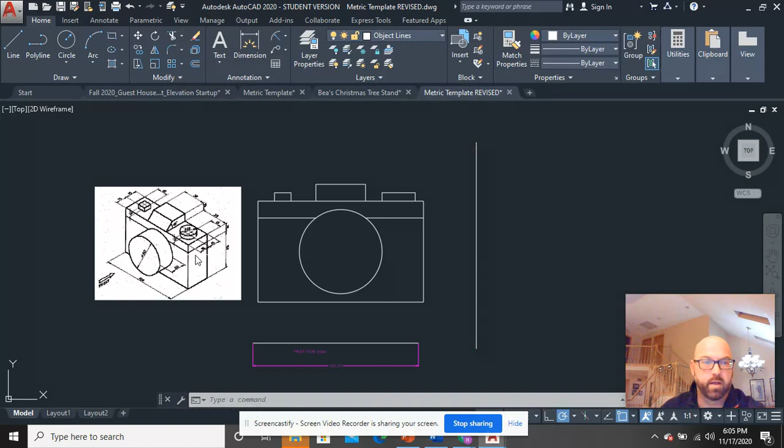So what I'm going to do is draw, looking at the right side here, a long vertical line. There's only a couple of dimensions that I'm going to have to input here.

So the width of the camera, they broke up into a couple pieces. They gave us the depth of the lens, which is 20, and then the body of the camera, which is 15 and 15. They did that so you can see that these buttons are centered, so they go 15, 15. So 15 and 15 is 30, plus 20 is 50.

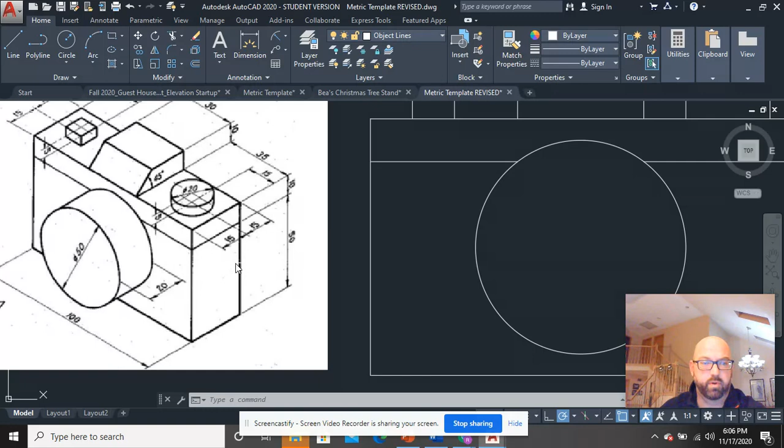So I can go offset 50, and that puts me at the back of the camera, but I needed the lens part as well. So I go offset 20, and then this area between here and here is all lens.

Why did I draw these lines longer than the height of the camera? So that I don't have to be careful, that's the reason.

So what I'm going to do is draw a real nice long line and shoot it over this way, again so I don't have to be careful. I'm going to tug this line from here and move along, asking myself, do I see this or do I not see it? So I go copy and I'm going to go from here. Now, what do I see?

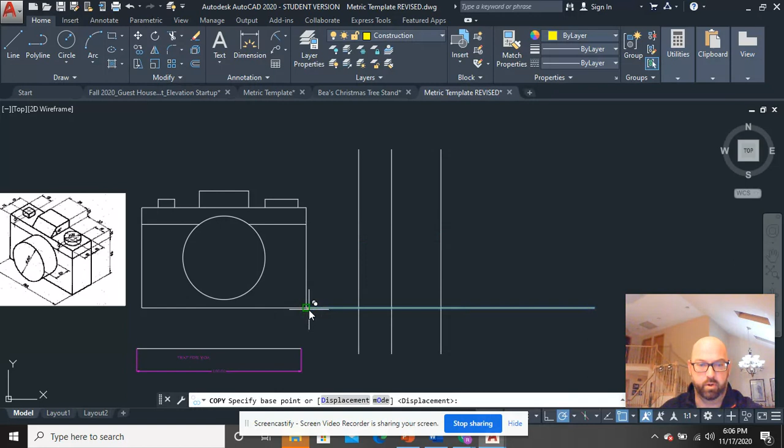I see stuff before I get all the way up here. Like from the right side, I would see the bottom of the lens. Now you can see why I made that line nice and long, so it goes all the way through the camera. Do I see anything else?

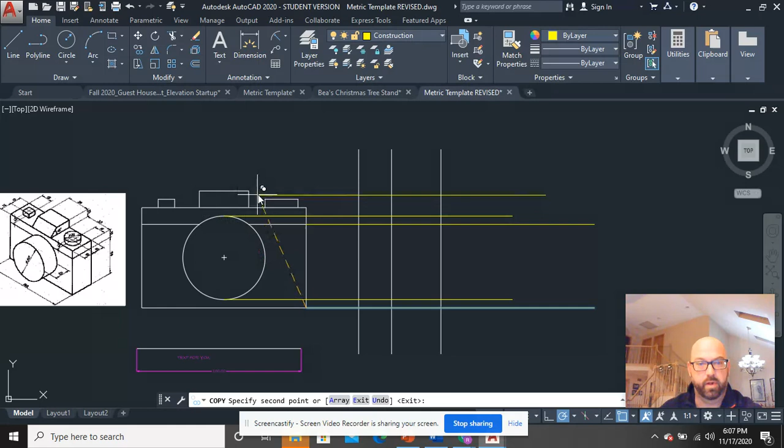Yep, I see this racing stripe looking thing. Do I see anything else? Yep, I see the top of the lens. How about now? Yep, top edge of the camera. How about now? Yep, I see that button. How about now? Yep, I see the edge of that wedge-shaped piece.

So it looks like you have a tic-tac-toe board from hell, but it's not that big of a deal. I'm going to neaten things up a little bit and go ahead and trim. I'm going to trim everything because nothing sticks back here, and nothing sticks back here, and really nothing comes inside of here, but let's go really careful, one step at a time.

I know that I can get rid of that and that, okay? That's the top of the camera, the tallest point overall. So let's work from the bottom up.

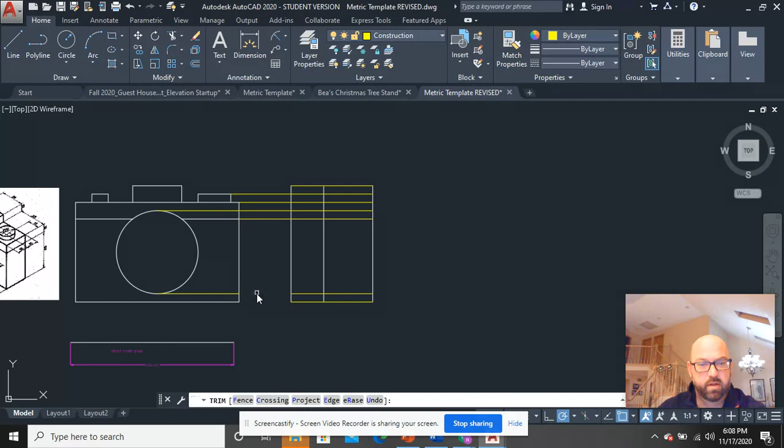What is this? This is the bottom of the lens, which we know doesn't stick in between. This is just the space between the two views, and we know the lens does not come down there. What about here? Do we have anything?

So let's go to the top of the lens and keep it easy. Here's the top of the lens. Follow the line over, follow the line over. And there is nothing above this right there. So that's the top of my lens.

Does this stripe go through the lens? It sure doesn't, so get rid of that and get rid of that. And there's the stripe.

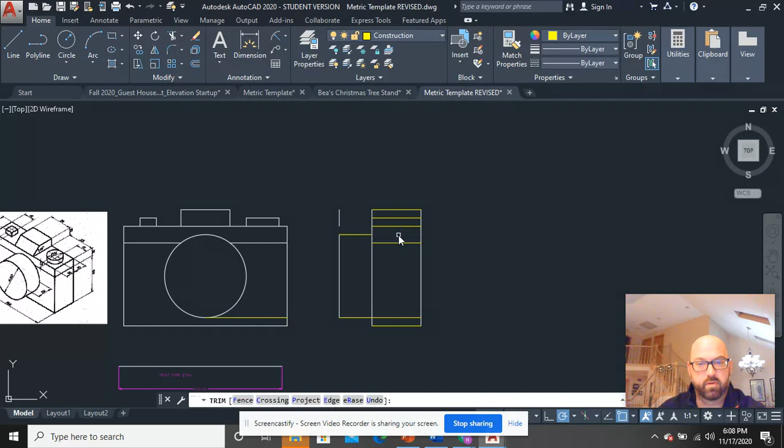This is the top of the lens. Look back over here, does the top of the lens go into the body of the camera? It does not, so get rid of that. Does the bottom of the lens go into the body of the camera? It doesn't, so get rid of that.

Take your time, and you might have to go back and watch this a time or two.

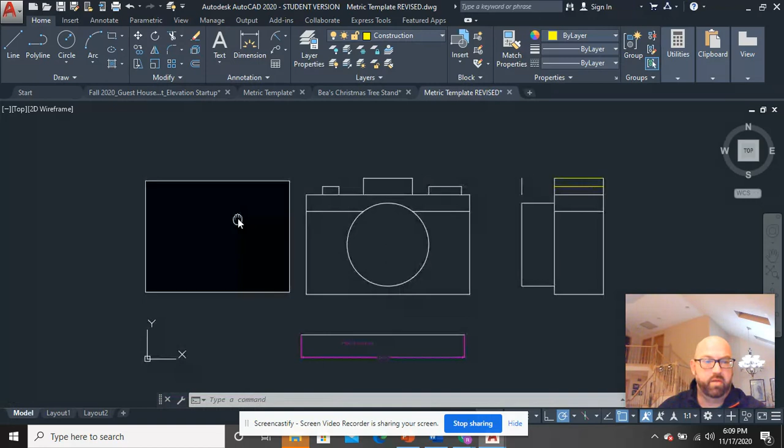All right, so these are all object lines. I can match properties, right? I can get rid of all this, and what I'm going to do is give myself all the information that is at this point clear to me. Okay, I've taken care of all of this stuff. I have a button over here, which we know has a height of 5, and we know it's a diameter of 20, and this happens to be the depth of the camera body, which happens to be 30. So all I need to do now is come up here and draw a line in the middle of this.

That's a height of 5, right? Which corresponds - this and this completely correspond. I never had to measure anything. And I'm just going to offset 10, go 10 backwards, go 10 forwards. This is a goner.

And let's go ahead and neaten it up. There's nothing there, there's nothing there. So there's that round button looking thing, okay? Match properties - I do this along the way so I can keep track of what I have done. And get rid of that. We're almost done.

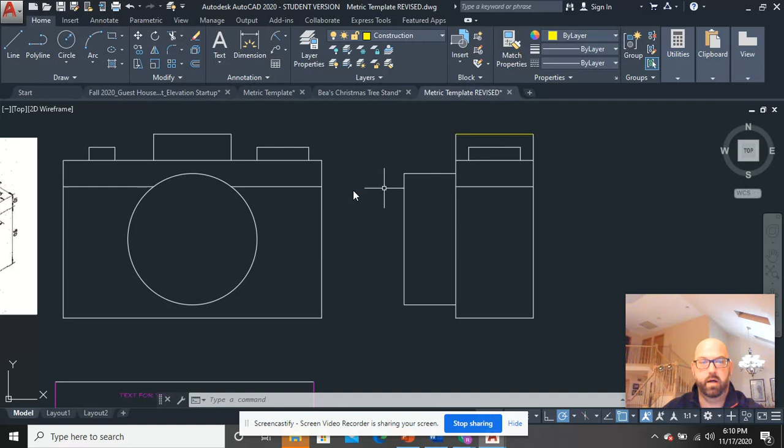Now I have to draw a line that is at a 45-degree angle. Okay, so remember, when you're drawing a line, we're at 0, and now we're at 90, and now we're at 180, and now we're at 270. So we need to go up here in the 45-degree direction. And we can do this specifically.

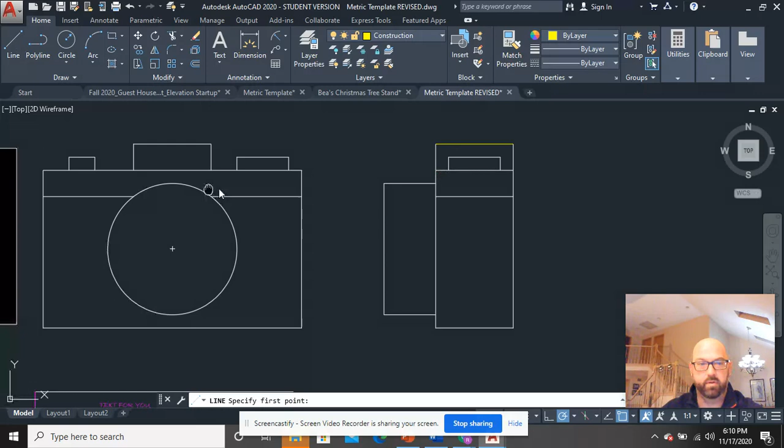In this case, I don't know what the length of that line is, so what I'm going to do is just stick this, right? We can look over here - yep, that slope comes right down to the front edge of the camera. So I can stick this right here. And I don't know what the angle... I mean, I know what the angle is, it's 45 degrees because it tells me it's 45 degrees, but I don't know the length. Who cares about the length? I know it's longer than - if this is 5, I know it's way longer than that. I'll just say it's like 30.

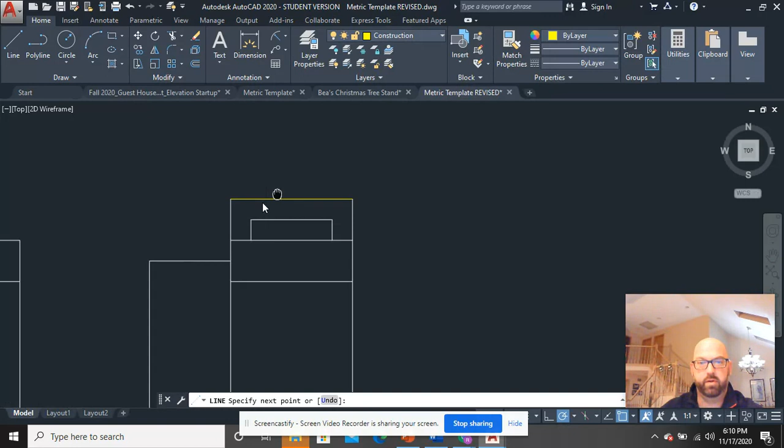Who cares? So what you've got to do is look at the command window here to see what I'm going to input, and I'm going to use the @ symbol, okay? And I'll just type in a distance way longer than I need, so I don't have to guess. So I type in @30, and then I use angle, which is the less than symbol - shift, comma - and I type in 45. So look at that command window: @30, angle 45, @30 less than symbol 45, and hit enter. And it shot this thing way up into outer space, but we don't care.

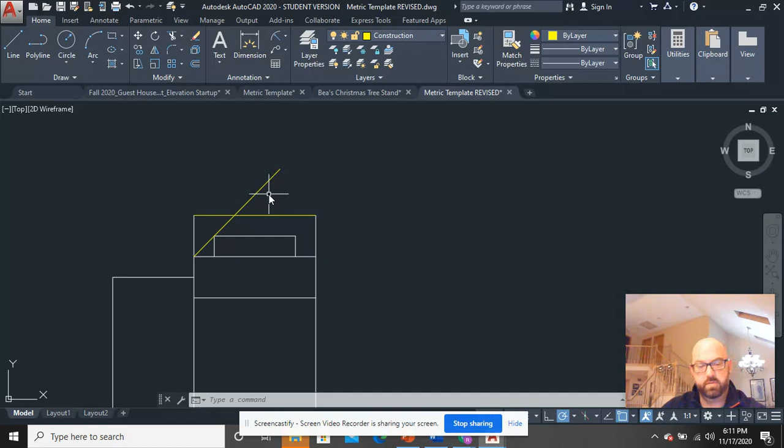Because now we just click it and trim it. And we're done. We can match properties - go ahead and select this and then select that, and the right side of our camera is perfect. Okay, the biggest thing about this is by doing that, I've assured that everything lined up.

If you started drawing this at random down here, okay - if you said, okay, here's my camera, I'm going to start drawing it this way - this method of projection would never work for you. Okay, so that's why I start with this big long line. I don't care how long it is. The only thing I care about is that it is straight up and down.

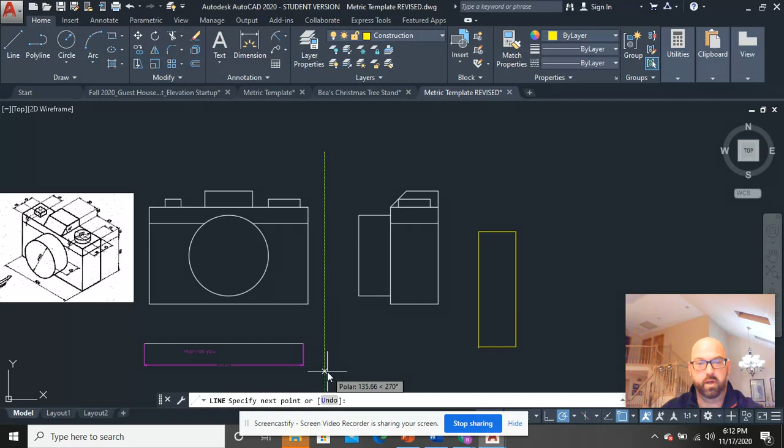All right, so try that out, and then I'll come back on the next one and finish up with the top.